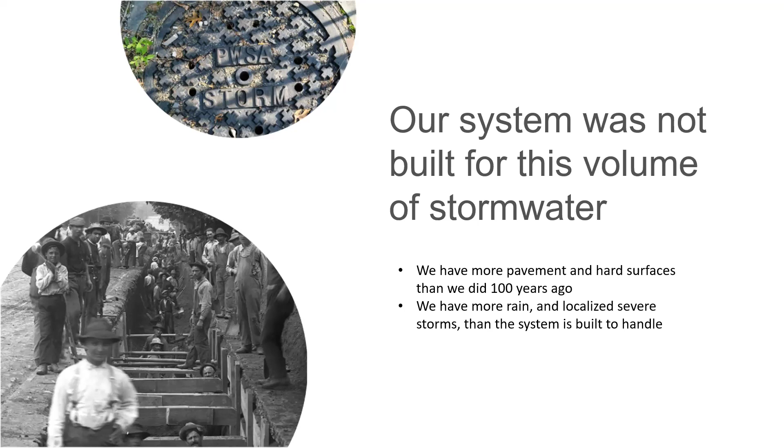If you've lived here for any amount of time, or at least one rainy season, you know that Pittsburgh has a stormwater management problem. There's really no two ways about that. Our system was not built for the volume of stormwater that we experience now in modern times. When this system was built over 100 years ago, we did not have as much pavement, as many hard surfaces, parking lots, tops of buildings, things like that. And all of that impervious surface, which is what we call it, contributes to water finding its ways to new places and not seeping into the ground. So when we have more rain and we have more localized severe storms, that system that was built to carry water away is not built to handle that volume.

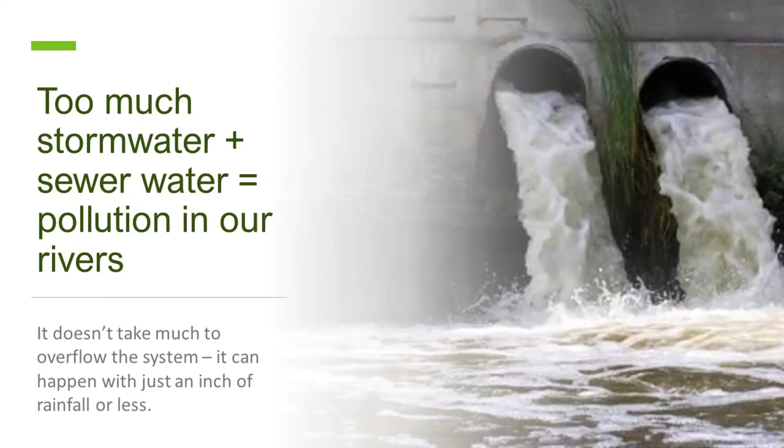So too much stormwater plus sewer water equals pollution in our rivers. PWSA, like a lot of older water systems and sewer systems in the country, have what we call combined sewer systems, which means that some sewer pipes carry both sanitary sewage from buildings as well as stormwater. On a good day when there's not heavy flows, that water makes its way to the treatment plant. But when there is an influx in stormwater, those combined pipes can overflow, and it can happen with just an inch of rainfall or even less. So what that ultimately causes is pollution in our waterways, which we of course want to avoid.

So to tackle our stormwater challenges, we're building stormwater management systems designed to absorb or redirect as much rainwater as possible before it causes flooding or enters those overburdened sewer systems and eventually our waterways surrounding the city. One of our biggest features is our riverways, so we want to keep those clean and healthy for recreation all the time.

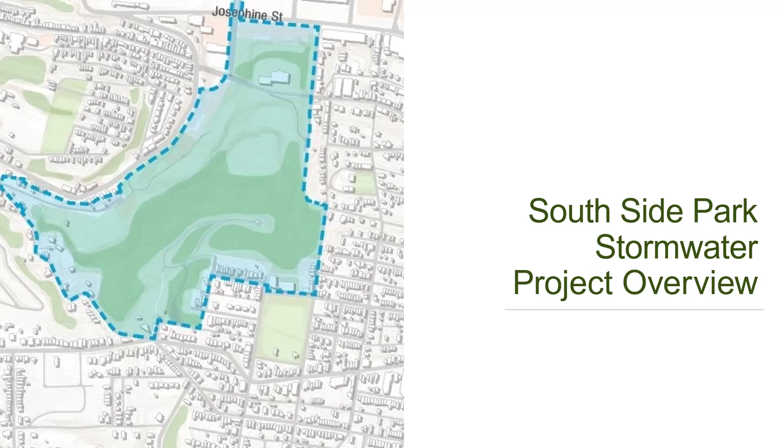I think a lot of you are aware of the Southside Park Improvement Project. You've been with us all along, attending meetings, and have a good understanding of what we're planning in the park. I'm going to go over it at a super high level. We'll get into the details with you all as we get closer to construction, but I wanted to tell you tonight about some of the movement you're going to start seeing in the park as we prepare to really get into construction of the stormwater project.

This Southside Park Improvement Project is a collaboration between PWSA and the city DPW, where PWSA is providing the stormwater facilities for the project, and the city DPW is providing the park amenities. The project has been in the works for several years now. A lot of you have been with us all along through our planning process. We've had some delays due to permitting and COVID slowing things down, but also before we got out there, we wanted to make sure that the PWSA infrastructure currently in the park could support this type of construction activity and stormwater management project.

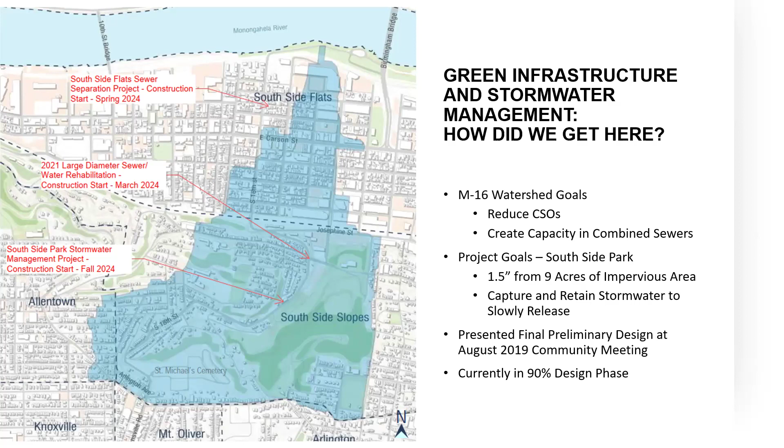We are just moving that concept and design into a final package that we can go to bid with. It says here that we're 90% design, but I would say we're probably farther along than that - we're just getting it bid ready at this point. So Maura, next one.

So the current project that we're working on, how did we get there? During the survey for the Southside Park Stormwater Project, we realized that the large diameter sewer located underneath the park, running its entire length, was in need of repair and structural reinforcement prior to the start of Southside Park.

So before we go out there and start moving dirt, before we have construction equipment on top of that large diameter sewer, which carries a huge amount of sewage through the sewer shed, we need to make sure it's structurally sound. So the work we're doing runs from the bottom of the Serpentine stairs all the way down into South 21st Street.

To accommodate that work, we'll be starting the Southside Park project uphill, north or south of the Serpentine stairs. Once the lining and water work I'll show you here in a minute is finished, we'll move through there with the stormwater project.

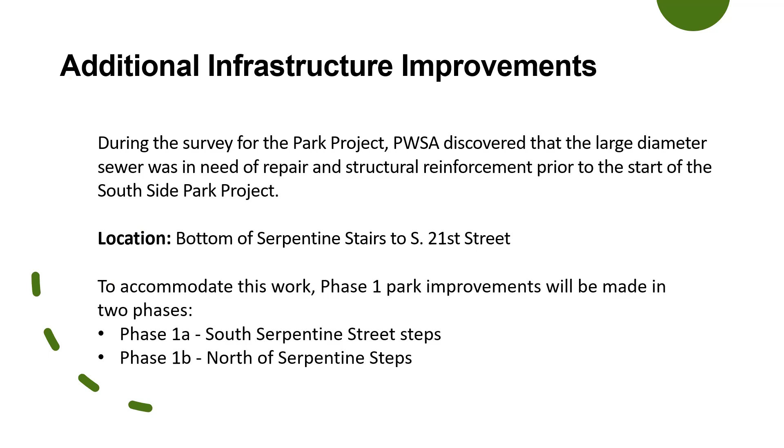So the overall goals of the stormwater project are to reduce combined sewer overflows, reduce basement backups, create capacity in our system, and slow the flow of stormwater from these higher areas down through the sewer shed.

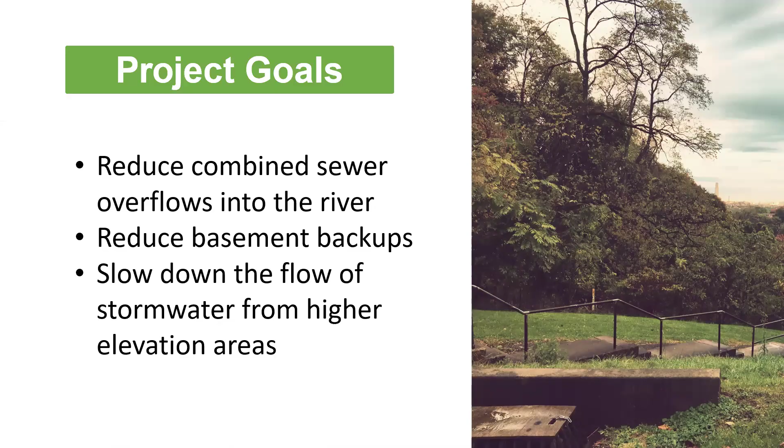We'll have stormwater facilities in the proposed parking lot area, all the way down adjacent to the site in the South 21st Street open space, where we'll tie back into the existing system. It's a really long linear stormwater system with multiple components all along the length of the park. Currently our design group, which consists of Ethos and Pashek plus MTR, is putting together our final bid package.

Hopefully we'll be done with that this summer to go to construction, hopefully this fall. Prior to that project, the stormwater project, PWSA is going to go in and rehabilitate the large diameter sewer that runs from the Serpentine stairs down into South 21st Street.

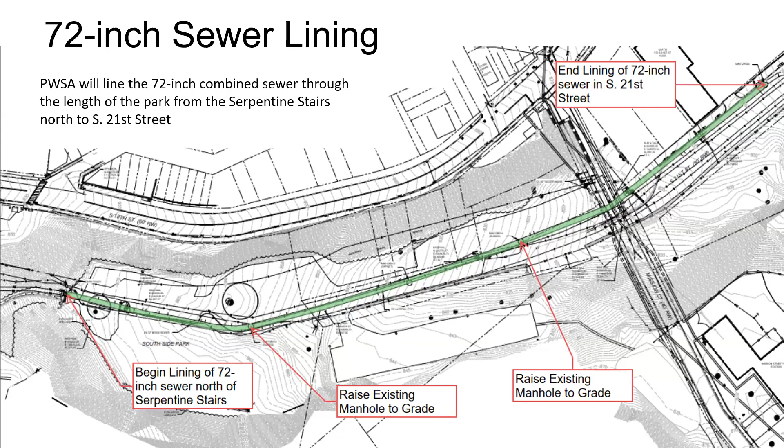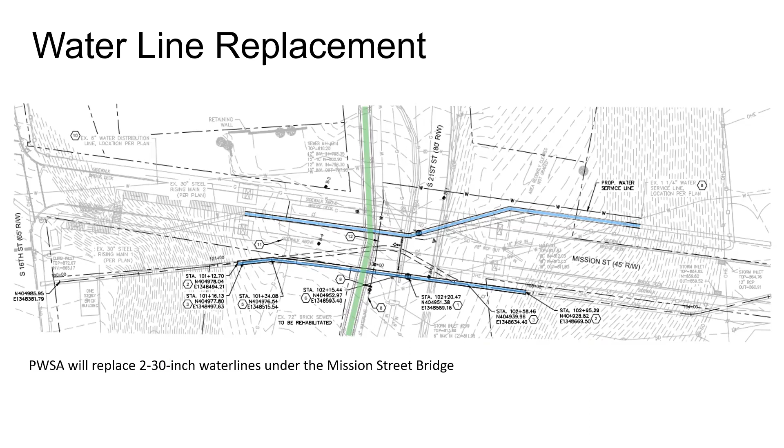So here we are. We finished our design for the rehab of our infrastructure. We are in January, having the pre-construction meeting for that work. We're going to start that work in March, and you'll see us moving out there. We're going to have the rehab of these facilities, this infrastructure, done by the end of 2024.

This stormwater management and park improvements will pick up towards the end of 2024. As for impacts to the neighborhood, the entire construction project will be located within the park, from the Serpentine Stairs down to South 21st Street. The contractor will close the Mission Street steps and the Serpentine steps as well.

So there will be no pedestrian access from the Serpentine Stairs down to South 21st Street and from the Mission Street Bridge as well. Water and sewer service will be maintained for all residents, and we will be updating our project website at pgh2o.com/SouthsidePark. We'll share information with Friends of South Side Park throughout the project.

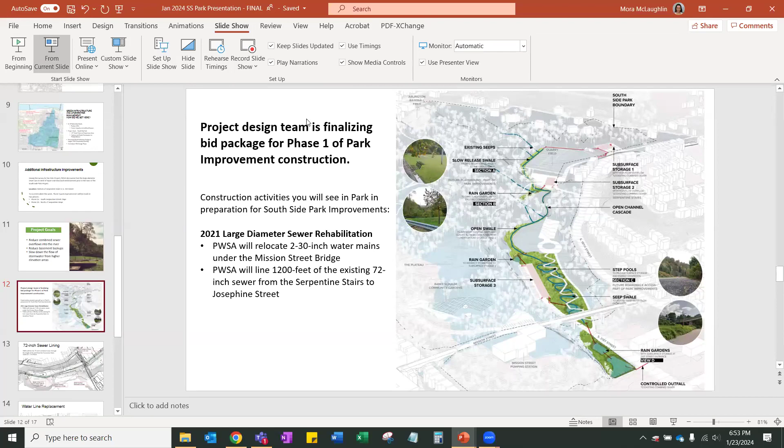Yeah, I don't want to put him on the spot here, but I noticed Barton Kirk is on the call. I don't know if you're still on here, Barton. I am, yeah. Okay, sorry. Barton is our engineer with Ethos Collaborative, and he's done the majority of the design for this project. I know a lot of you have seen our presentations before and are familiar with Barton, but I think he is the best person to talk about the infrastructure on the site.

Yeah, so working from this graphic, we are utilizing a variety of green stormwater infrastructure techniques and systems. Starting at the top, it's all sort of networked and working together. At the top, we have a proposed parking lot where the playground is presently above Quarry Field. With that, we're basically swapping — there's currently a parking lot below Quarry Field and a playground above, as part of the master plan for the renovation of the park.

Those two areas are swapped, and underneath both that parking lot and the playground, we are utilizing subsurface storage chambers, which doesn't necessarily come to mind for most people when thinking about green infrastructure, but it is a way for us to capture a large volume of stormwater and integrate it into developed areas of the park.

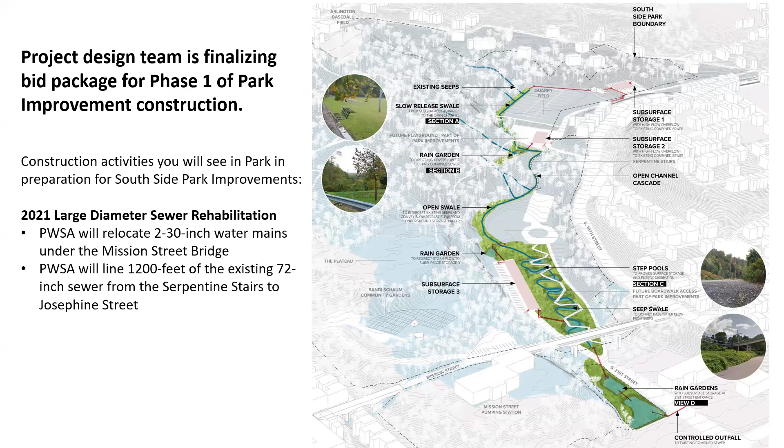Yeah, I see your question there, Lori. Do you want me to read that off, Mora? Yeah, I see it as well. So Barton, Lori's asking: Mr. Kirk, can you share the historic land use? Is it residential or industrial? I'm asking because I wonder if the water that's infiltrated is going to flow through industrial residues into the aquifer.

Yeah, so the history of this site is it does have a long history of industrial use. It was actively mined and quarried and was the site of a brick factory for some time. Once that industrial use ended, the park was reconfigured—most of the land area was developed into a park in the 30s and 40s that went through several different phases of baseball and football. There was an ice rink constructed and tennis courts, things that have come and gone over the years, but there is that legacy of industrial use.